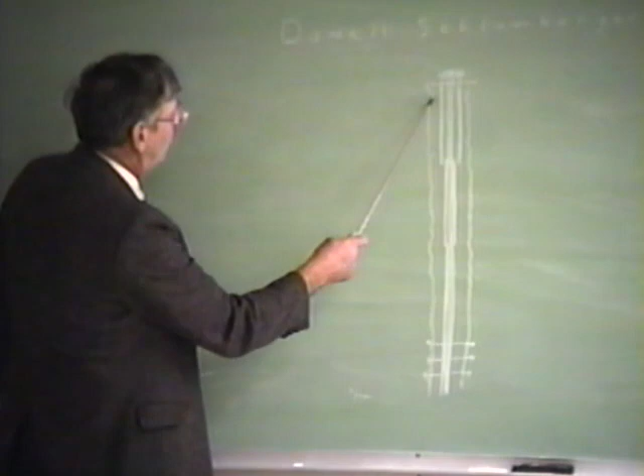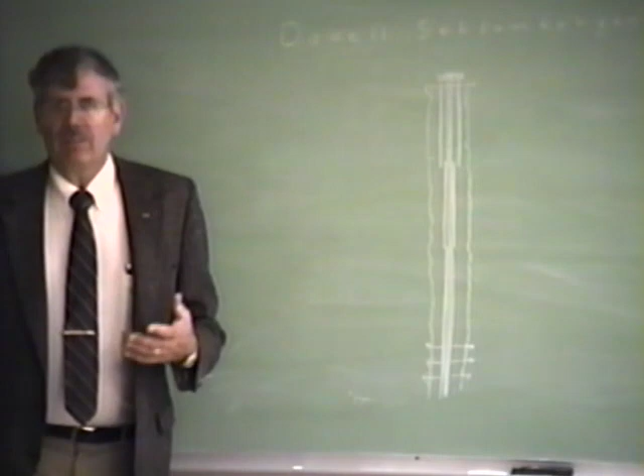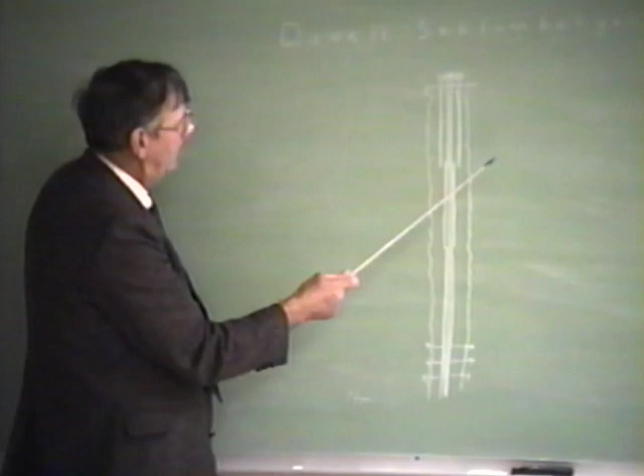So basically, the first thing they do, they start drilling, and they drill a hole in the ground. They drill so far, and then they put pipe in the hole, what we call casing. The casing has to be cemented in place to protect the water formations. So they'll come in here, drill a hole so deep, and put a string of casing in the hole that may be 13 3/8 casing. We have to cement that casing in the hole.

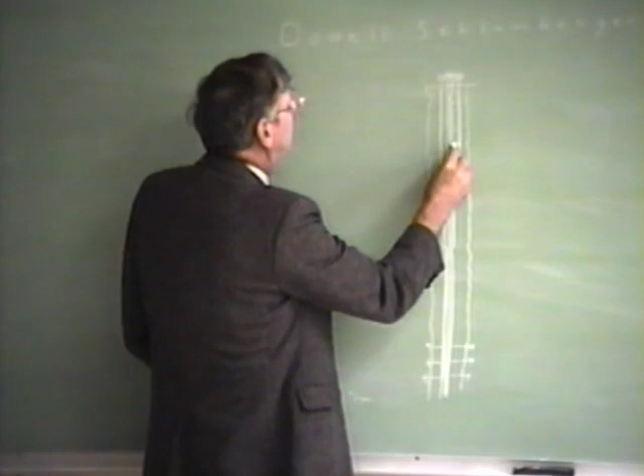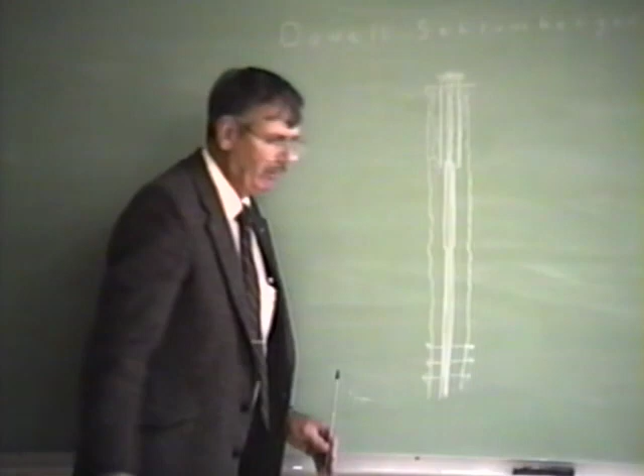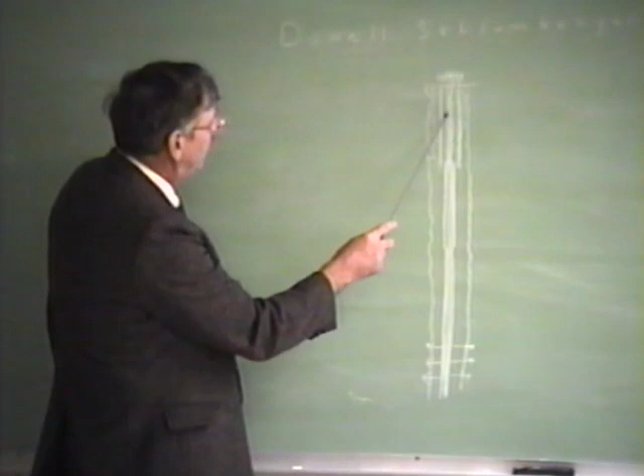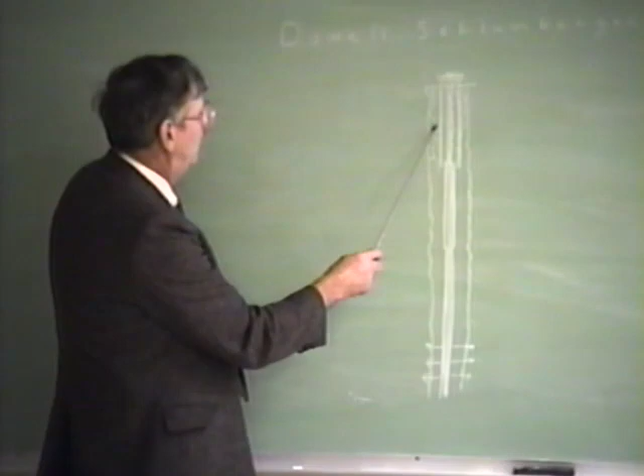So what we actually do is we pump down that casing, as deep as the pipe will go, and we bring cement plumb back to the surface. Therefore we call that a surface job. That's the first cement job that happens on a well. It takes some real technical equipment to do this, and you'll see some of it a little later in the presentation. So we pump the cement until we get cement back to the surface. Then we know without a shadow of a doubt the annulus, we call it, is completely full of cement, and the pipe is cemented in the hole.

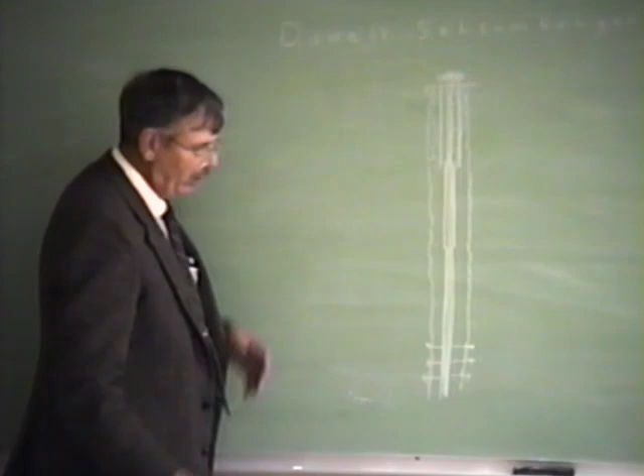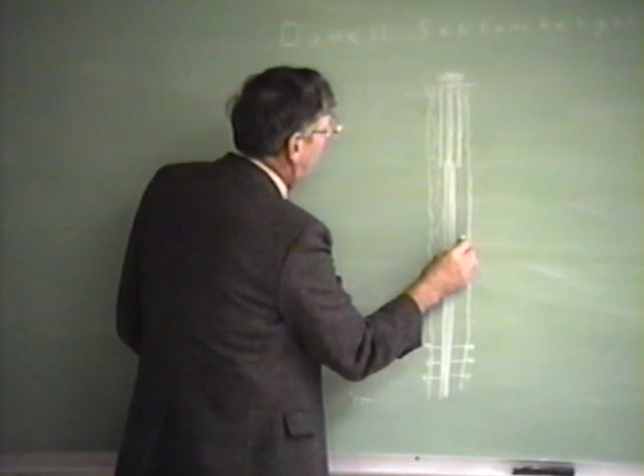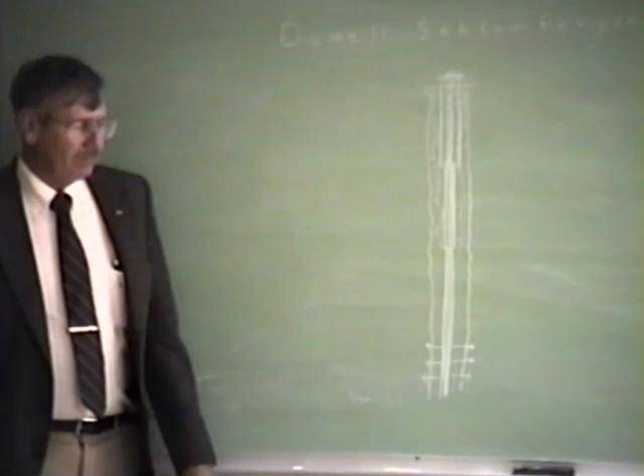Then the drilling rig resumes, drills another maybe 5,000, 10,000 feet. We do the same thing. He'll put some pipe in the hole. We'll come back and we'll pump cement in there again. Now, we won't bring cement back to the surface at that time because you can't do it. It's impossible. But this may happen 3 to 4 times in the course of drilling a well. Once the bottom string of pipe is in the hole, we call it the production string. That's the last string of pipe, and they're going to produce the formation through that pipe.

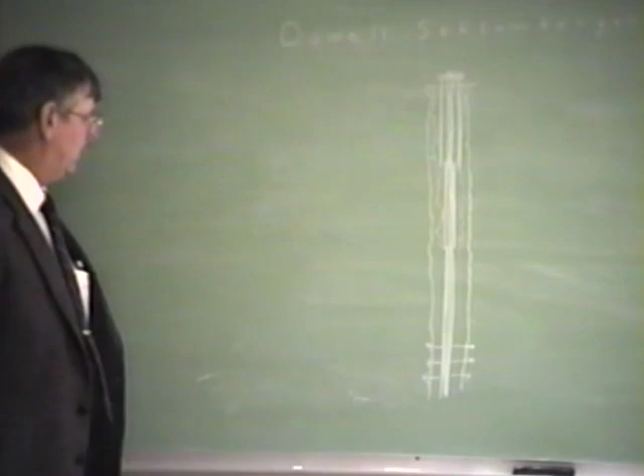Once that's in the hole and cemented, we go in there and we perforate, because the oil don't just come flowing in like a maniac. And needless to say, the pipe in the hole does not have holes in it, so there's no way for the oil to get in there anyway. So if this was the pay zone right here, they'll perforate this whole area. They may shoot 130 holes in that casing. Then the oil that's present right at the well bore would flow into those holes and you could pump it out.

The problem is that's very little of what that pay zone actually entails, because it may go out here for a half a mile. So next someone like Dowell or Halliburton or Western Company or BJ will come in and do an acid job on this. They'll go down here a couple of days before, and they'll pump acid that's anywhere from 7.5% to 28%. The acid is inhibited, so it doesn't eat the pipe up, and it's also flushed, so there's no acid standing in the pipe above the top perforation.

They'll let that acid usually work for a couple of days, and then they'll go in and frac it. What do you do when you fracture your elbow? That's right, you break it. So we're going to fracture this formation. Those cracks will migrate out from the well bore, in some cases 300, 400, 500 yards lengthways. There's a tremendous amount of pressure from the overburden, the weight of the earth on top of all this. So when you crack that formation, it don't crack like this. It cracks like this. How they know that, I don't know. I've never been down there, and I hope I never get down there.

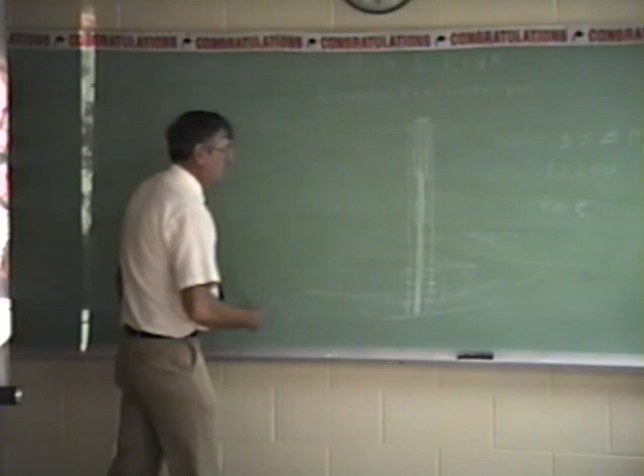Is that well just deep, or why is there so much? Yeah, a lot of it is deep, and it's a very active area, but to actually get a frac job and get this formation propped open, it takes a humongous amount of sand. Because instead of this well bore being, like I said here, maybe 80 to 100 yards, shoot, this might be a half a mile. So you can see how everything changed.

Some other things that changed, you may know a little bit about horizontal drilling. Okay. Let's say this is 130 feet from right there to there. So how thick is your production zone? 130 feet, right? Okay, what happens if you do this?

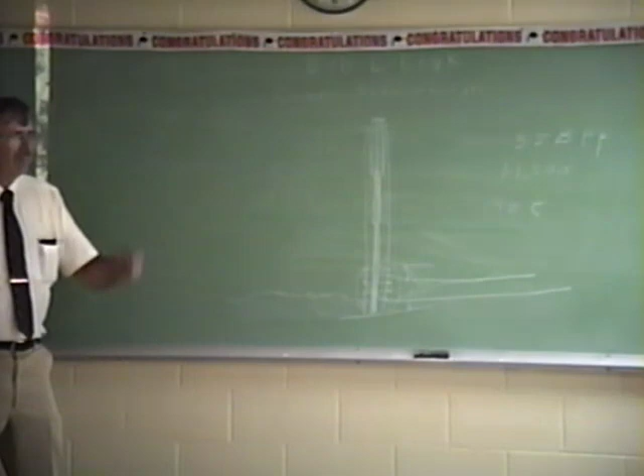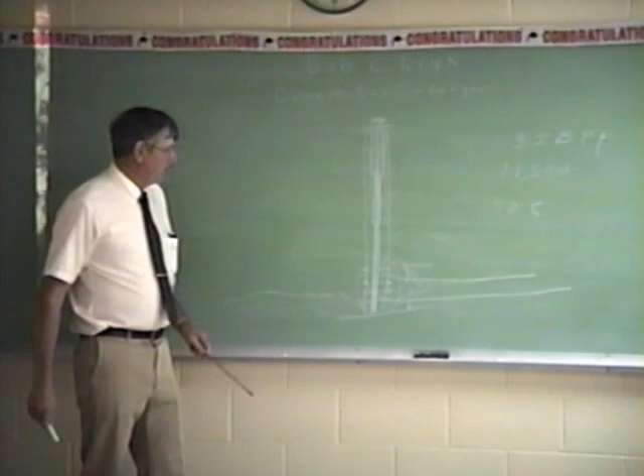Now how thick is your production zone? How far can you drill that? That's right, how far can you go? So you change that from 130 feet to how far you can go. That may be 500 or 600 feet now. So that's what you did to your pay zone. So let's say that this thing was producing 85 barrels a day right here, and we do that, you may well find that this is 280 barrels a day.

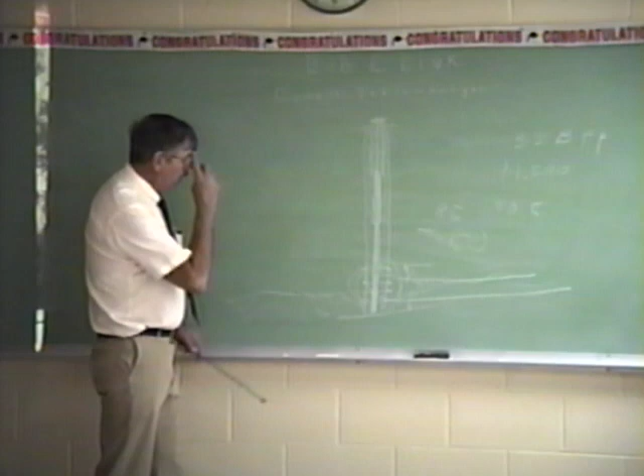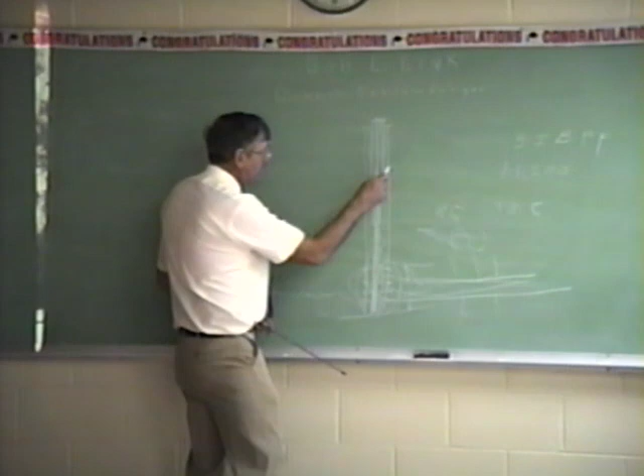Now there's a lot of problems with that. What I told you about here a while ago, we can go ahead and cement all of this in like we talked about. Okay? Now how are you going to cement this in? That string of tubing right there, casing, it's very difficult to say the least to get a good cement job on that, but you've got to have one. Because another thing you're going to do now, your preparation you're going to be doing on this, and this really looks different. What I've drawn here actually takes place like that, but the concept is the same.

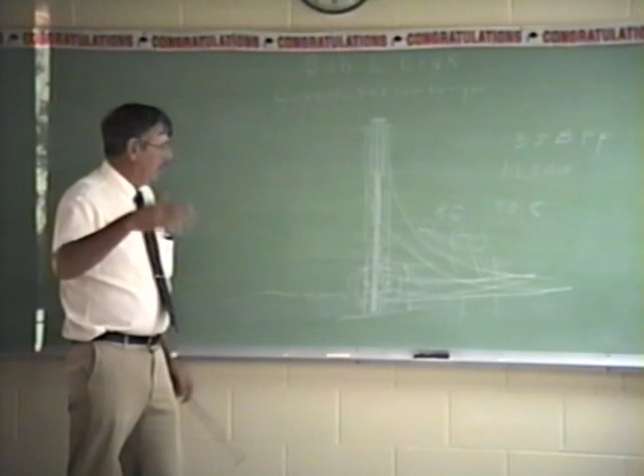So here you go. Now you've got to shoot holes now for 300 yards instead of 130 feet. So all those costs go up, but certainly production comes up more than just equivalent to it. But the processes are considerably more complicated. So to answer your question, that's how, you know, the areas involved are a lot greater.

And a granite formation like you might find in the Elk City area would be very tight, very confined. Bottom hole pressure should probably be 10 to 12,000 psi. Most of this stuff here will be 3 to 4, 8,000 maybe max. So since the pressure's not near as great, your fractures go a lot further, you put a lot more sand in. Your production comes a lot bigger. Any other questions there?

Some other things that change what happens down here drastically is temperature. You may have a cold formation and you don't put any kind of accelerators or anything in your cement. It's set up real good. Cold takes longer to set up, but it's set up a lot harder. But you might find bottom hole temperatures over 300 degrees.

So what happens if the temperature cooks all the water out of the cement? What kind of a cement job do you have? Chalk. So what you have to do is you have to put an accelerator in the cement, so the cement actually sets up before the formation dissipates all the water. So there's really a real science behind all of this. It isn't as simple as it seems.

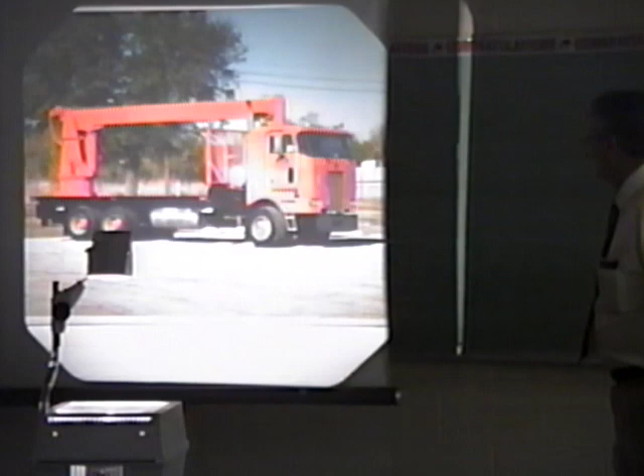Give you a little bit of an idea about some of our equipment. I told you that we have built very little new equipment in the last several years. This is a brand new unit. It's the Peterbilt cab over. It has a 3176 Cat under the hood. Typically this unit will have an 8-speed forward transmission and tandem axle rear ends, and they're more likely than not going to be Eatons.

And this unit weighs probably 35,000 pounds. And will haul coil tubing, roll coil tubing on it, or a bunch of treating connections. So you'll notice it's got 15.25 duplex tires on the front. So it's going to be pretty heavy when we get through with it. And it'll probably weigh right at 50,000 pounds, which is about all you can put on a 3-axle truck.

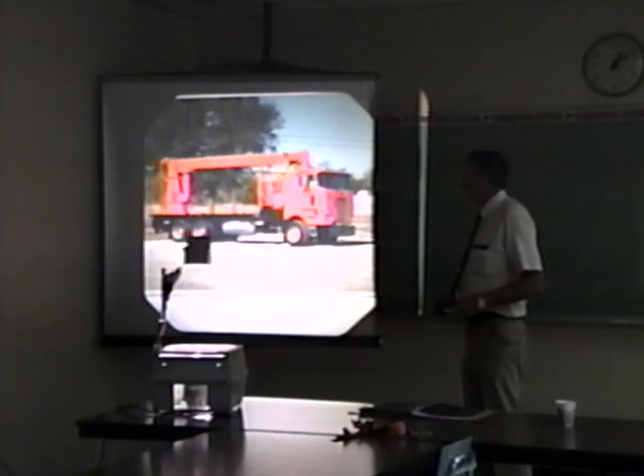It's basically the same unit, only a smaller version. Some of the things you're going to see when you work like we do in Oklahoma, Texas, Arkansas, and then we go to Kentucky and West Virginia, a lot of things change in the oil field. Where we've got a location that you can put 18 frac pumps on, they're sitting there fracking a well with trucks on 3 different locations, stringing pipe between them because there's no room up there on the side of the mountain. So the other unit was a cab over, considerably shorter than this unit, and easier to get around on tight locations.

This boom here extends to probably 45 or 50 feet. And certainly you can't pull as much out here as you can back here, but like it's setting, it'll lift about 3,000 pounds. Just set it about anywhere you want to set it. And it also has a 3176 Cat engine in it.

Okay, and then I was telling you about the coil tubing earlier. That's a coil tubing unit, and when you get to the well site, there's going to be a roll of tubing on that spool. As much as 20,000 feet of 7/8 or 1-inch tubing that we could run all the way to the bottom like I talked about and pump nitrogen through.

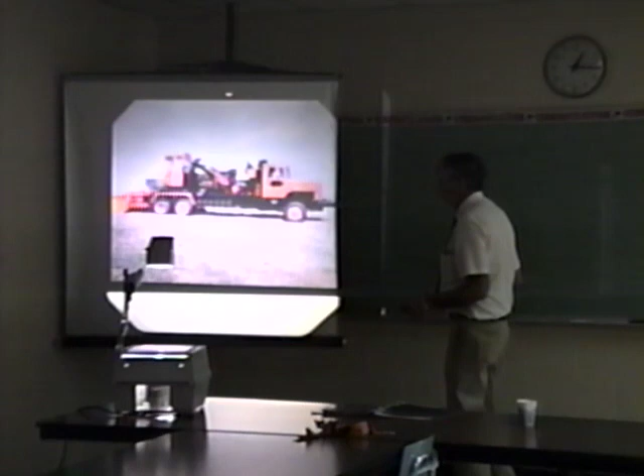This is an older unit. It's a blender. So where we were talking about the 18 frac pumps, they will all be supplied by a pump like this. We'll dump sand into this hopper, mix it in concentrations up to 8 or 9 pounds to the gallon, and pump it with a pump that sits back in there behind where you can't see at about 100 psi, almost 100 barrels a minute. That truck will pump just about 100 barrels a minute.

And it's all controlled from this console right here. So if you've seen this thing going down the highway, the tub would be folded up back up against here. And when he gets to the location, he lets it down and he actually operates it from there. The truck engine has a transfer case. The truck engine runs the discharge pump, and the deck engine runs the pickup pump, we call it. This typically is a 6V71, and that's an 8V71.

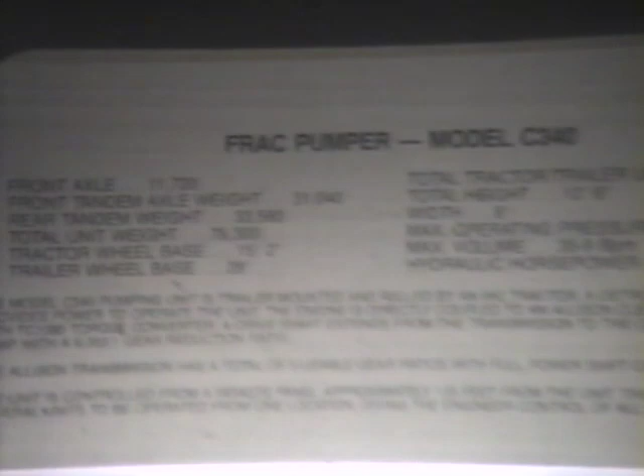What I was going to tell you though, if you look at this breakdown there, you can see what the steering axle weighs, what the tandem weighs, what the rear weighs, and the gross is 76,300. What would have been gross in Oklahoma several years ago? You know, 80,000. So you could not have gone down the interstate highway with anything over 80,000 pounds on an 18-wheeler. Okay. So you see, we're within just right at 4,000 pounds of being gross now.

5 to 20,000 psi, depending on what fluid end is on the machine. Okay, 35 down to 9 barrels per minute, depending on what fluid end. 1,400 and 1,500 horsepower. Basically, that goes on to tell you the same stuff I told you, but it's not right. That is very obviously not a 16V149. You know what a 16V149 looks like, don't you? That one sitting right out here on the north side of the building. The gray one, the first big engine you see outside.

Okay, why don't we take a break there? Let me get our voice back here a little bit.

A question, he asked me if all I did was run around, you know, and talk to guys like you, and coincidentally, it's not. So I thought I'd tell you a little bit about what I am.

There were these two guys sitting in this office one day, and this one was a brand new fella, about like y'all, looking for a job. And this other fella, I'm going to call him an older fella, but he was probably a young guy like me, see. He's sitting there at the desk thumbing through this book. So sooner or later, this young fella, his curiosity just, you know how you guys are, just gets the best of you. Just can't keep quiet. He says, what is it you're doing? Are you in here looking for a job? And he says, no, I'm not looking for a job. And he says, well, why aren't you looking for a job? I said, well, I work here. Oh, you work here? Yeah, well, what do you do?

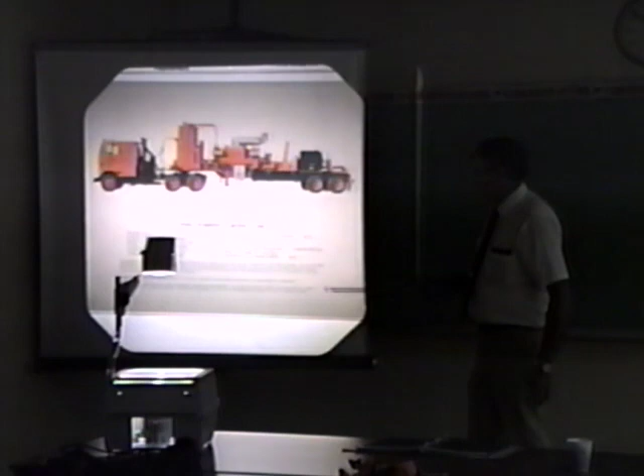And that is a Detroit Diesel on this particular unit. It's a 149, 16-cylinder 149. And that unit will pump 1,450 hydraulic horsepower any day of the week. That's a fantastic pump right there. The rod load on this power end is like 197,000 pounds per square inch.